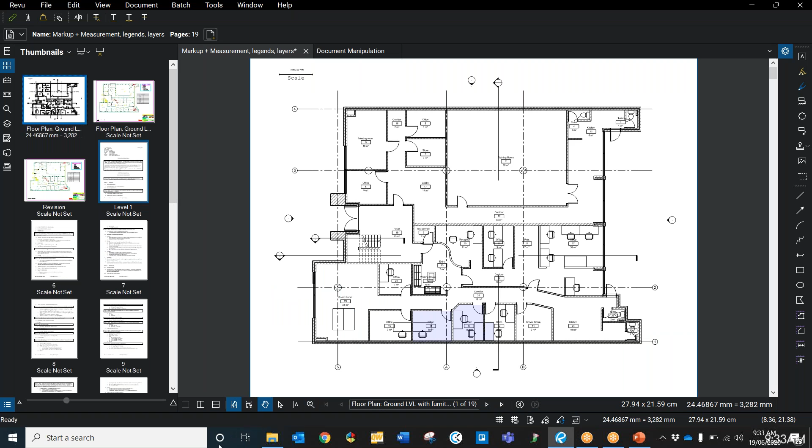All right, so I'll go into a couple of the ones that were sent in. The first one I had was to do with document comparison. I'm just going to close these that I opened and reopen some other ones. Someone asked me how they compare drawings. This is something I should have gone through during the sessions, but I forgot to, so we will go through it today. Let's just close these. Some different ones, sorry. Give me 2 seconds.

All right, so we've got 2 drawings here. One's a revision of the other. We've got an original drawing and then a revision that has a few different changes. There's 2 different ways we can compare drawings in here. Go to Document and then Compare Documents. The trick is to have whichever one is the original document as your active drawing, so that when you go into Document, Compare Documents, it picks up the active drawing as document A and the second drawing as document B.

In here you can manually align them, so you can select a window or you can pick points. Let's say you've got one drawing that's A1 and one that's A3. You can pick points on each one to align them so that they're the right size. Quite often you get drawings where the content's just moved up a centimetre on the page, or down or to the side a little bit. You'll find that if they're not aligned, it goes a bit crazy, so you can pick the points and align them if you need to.

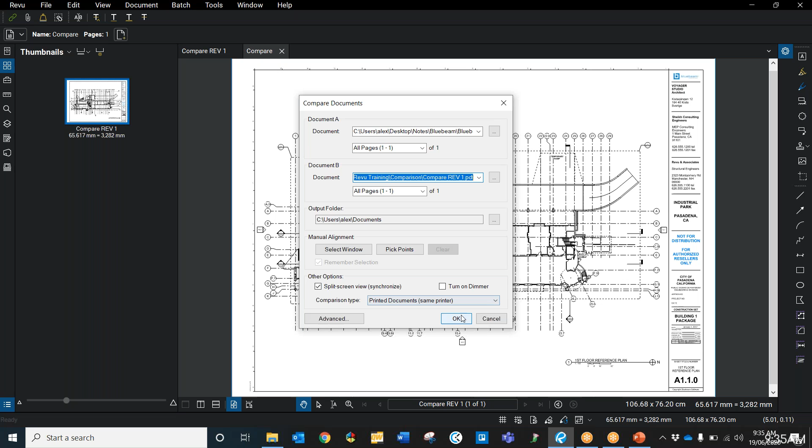And basically all it does is bring up the second one with all of the differences from the first one clouded. So anything that's been added is clouded in red. Anything that's been taken away is also clouded in red. So it's nice and easy. You can see quite easily what's changed. Once you zoom in, you can see that that wasn't there before.

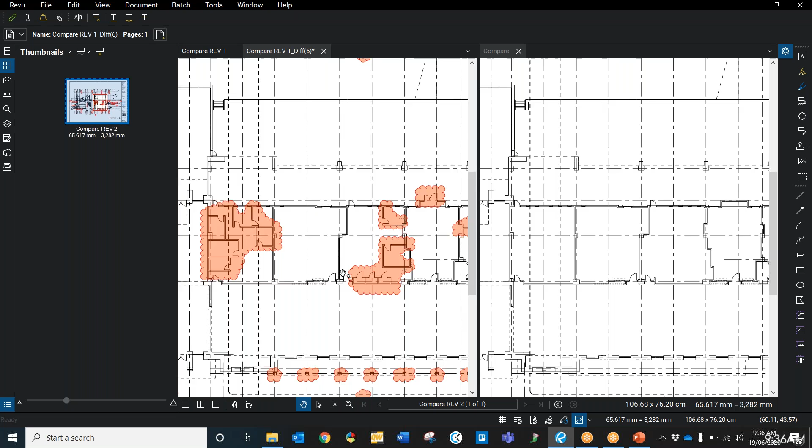We've got all these new rooms added, some doors added and stuff like that. And then we've also got these flags that have been taken out as well. The cool thing about this one as well is all of those clouds go into the markup list and their subject is Difference. So from here, you can generate a report of the markup summary. So go to PDF summary and then append and hyperlink to current PDF and hit OK.

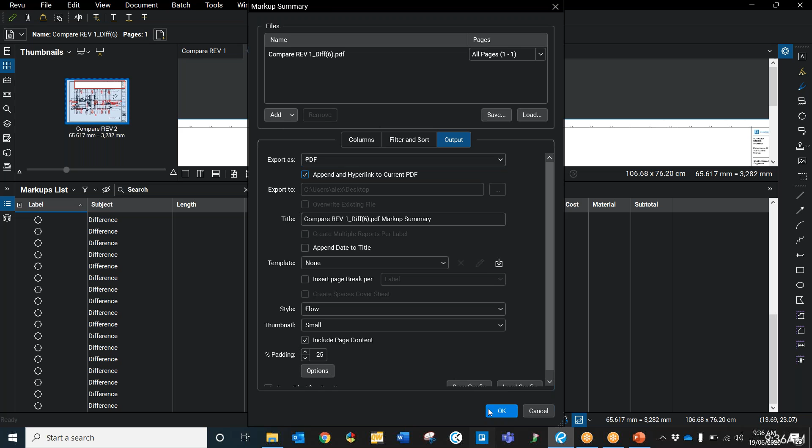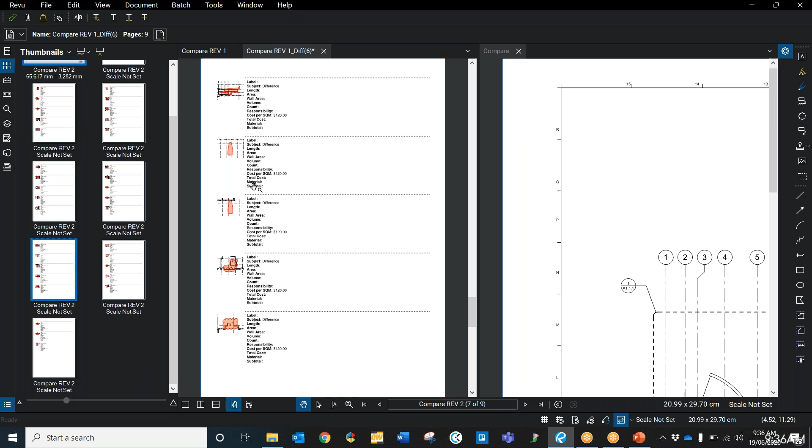Takes a couple of seconds to process. Cool, so then it comes up in here and we've got basically a report of all of the differences that we could send off to someone. Let's say the project manager wants a report of what's changed in the drawings, or just the boss wants to see what's happened. You can send a really simple report. If you click it, it hyperlinks to where it is in the drawing as well. So that's one way of comparing documents.

The next one is through the overlay function. So once we go back into here, the same thing, keep the active drawing as the first one. You go to document again, and this time overlay pages. This one, basically what it's going to do is put one drawing in one layer in red, one drawing in another layer in green, and then it will put them on top of each other, and you'll see what's not in the second drawing as red, what's in the second drawing that wasn't in the first as green, and then whatever's the same will go on top of each other as black.

You can change these colors, but I recommend to leave them as red and green by default, because it's much easier to see the differences. If you change, let's say, the green to blue, it's really difficult to see the difference between blue and purple once they go on top of each other. So unless you're colorblind and you can't see red and greens, then probably leave it as those. You can also add more drawings in here if you need to as well. So you can compare as many as you want with this function. But yeah, in this application, I'm just going to use these two.

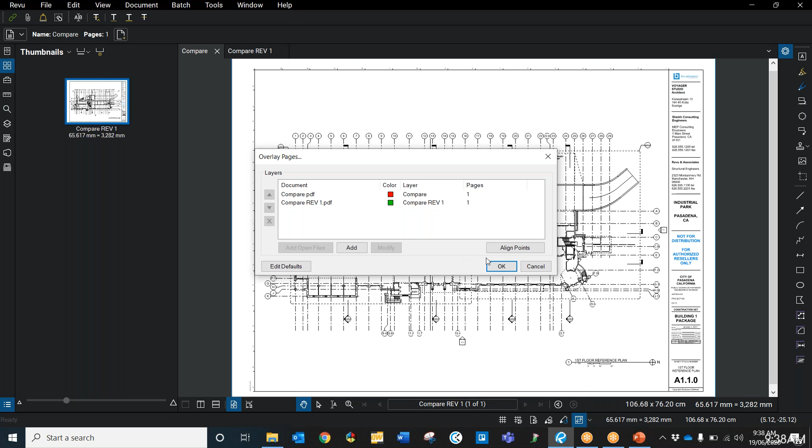Same thing, you can also align points through here. So you hit align points, and it'll ask you to pick 3 points, and it'll put the drawings on top of each other so that they match again. But hit OK, and you'll see whatever is in the second drawing that wasn't in the first is now green. Whatever's not in the second drawing that was in the first is red. And everything that's the same on top of each other is just black.

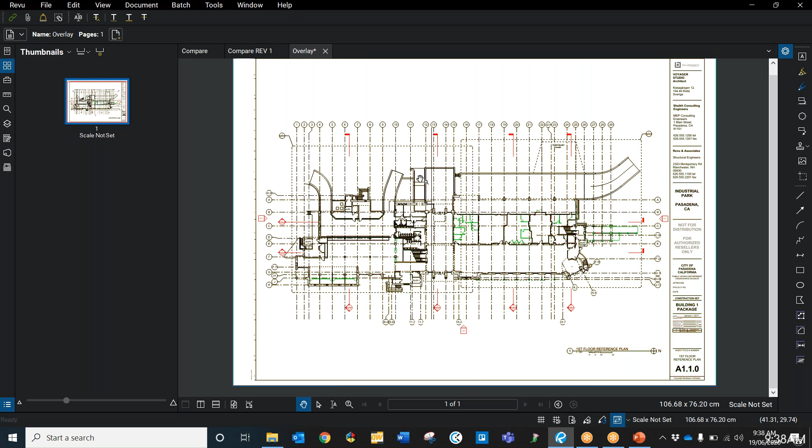One thing to note, this is quite a handy tool. If you do the first function, the compare documents, and you get clouds everywhere, it's impossible to see any differences. Quite often, sometimes the drawings are a little bit different quality. And if you go into overlay, you tend to see that the lines are just slightly not where they're supposed to be. So it's a good way of checking whether your drawings are matching up, and then you can use the pick points if they're not as well.

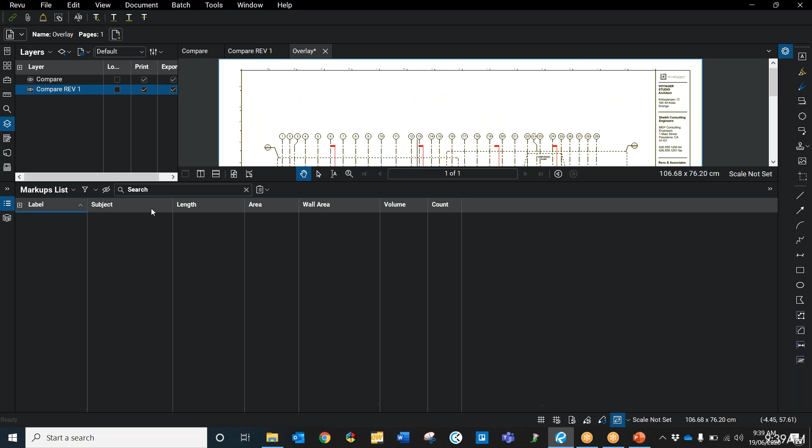But yeah, you can also go from here into the layers panel, and you can see they're in different layers. So I can turn off the first one, or I can turn off the second one as well. So I can just see each one. And then yeah, so that's one good way. The only thing with this is it doesn't give you a report of all of the differences. So you'd have to manually do that yourself if you wanted to. Or you could then use the compare documents function against the original again, and you get a cloud of all of those. So that's the two ways of comparing documents, guys.

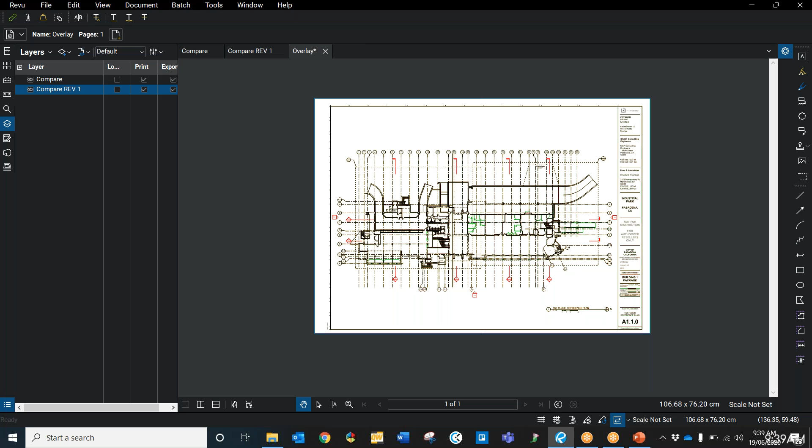So has anyone else got some more questions for me that we can answer? Or I go into some more that were sent in.

Hey, Alex, could you go through the reuse tools again? Yeah, sure. Just give me 1 sec. I'm just reopening Bluebeam. It went a little bit crazy for a second there.

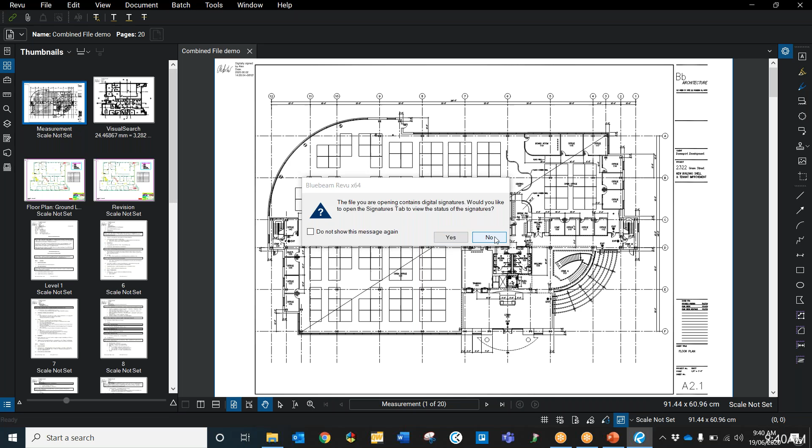All right, so yeah, Ty just asked about the reuse function. So as a sort of standard, when you open up Bluebeam, this doesn't come turned on. There's two different ways you can turn it on, but normally if I go to user tools, so let's just say I go to draw a cloud. When I click on the cloud, I can draw my cloud, but then as soon as I finish the cloud, the tool is no longer active, so I can't just keep drawing them.

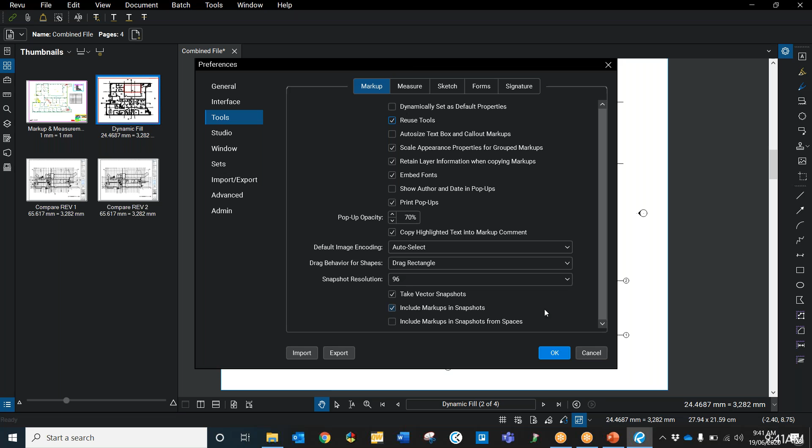So the reuse tools function, you go into Revu and then preferences, and then it's under tools and markup, and then you've got the reuse tools function here as well. So you turn that one on, and then we just hit OK. And now if I go to draw my cloud, I can just keep drawing them until I decide I don't want to anymore, and then just to get out of the tool, you just hit escape.

So the idea is if you're reusing particular tools quite regularly. Let's say you're dropping symbols onto a drawing. You obviously don't want to have to go back and click that symbol every single time you have to do it. You want to be able to just continue dropping them and putting them as you need to. So that reuse tools allows you to do that.

The other one that was really good to note in there as well, under Revu and preferences, is the auto size text box and callout markups. So if you turn that one on, what it will do, so let's say I draw a text box now and I draw it really, really big, for example, and then I just write my text goes here, and then hit escape. The text box auto sizes to the size of my text for me, so I don't have to go in and adjust it and that kind of stuff.

Just going back to the reuse tools as well, the other way you can turn it on and off is just through the status bar down the bottom here. If you don't have that turned on, it's just tools and then toolbars and status bar. It doesn't come turned on by default, but it's quite a helpful thing to have turned on. So this one here with the little kind of blue symbol on it is the reuse markup tools. So you can toggle that on and off through there as well, depending on what you're doing. So yeah, that's the reuse tools, guys.

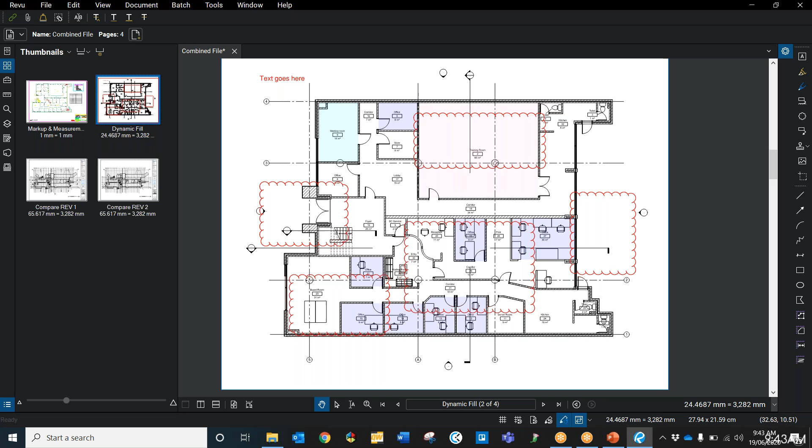Who's next with a question? Right, I've got a couple more that have been sent in that I can go through as well. Let me just see which one I should go through first. So, hi Alex, can you show how to calibrate again? Sorry, what was that, Lim? Can you show how to calibrate the drawing again? Yeah, not a problem. So that's quite an easy process.

I'm just going to go to this one. So obviously most drawings you get will have some sort of scale or a measurement on them. You hope so anyway, as long as they're drawn to scale. So with Revu 2019, it will auto prompt you to set a scale if there's no scale set on your drawings. But if you want to check it anyway, you just go to the measurements panel and then hit calibrate.

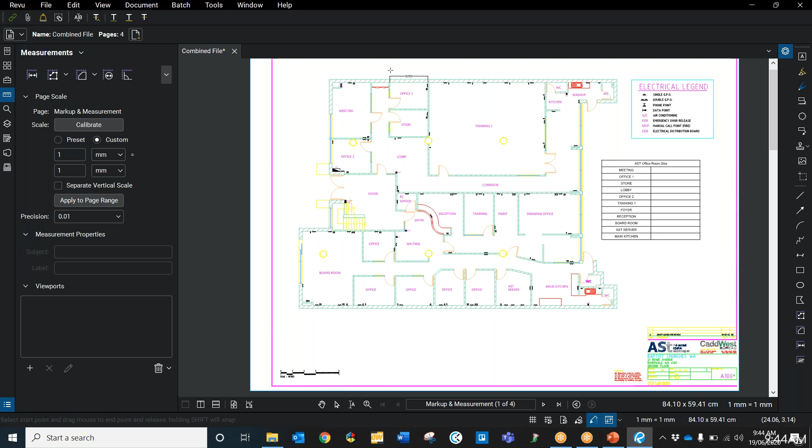Well, there's two options here. So you can actually just set a preset scale. So let's say you've got 1 to 100 or 1 to 50 or whatever it is, you can set it through there. Or you can do a custom scale and we go to hit calibrate and it'll ask us to select two points of a known dimension to calibrate measurement tools. So hit OK. I've got two options here. I can use my measurement up the top here. I can use my scale down the bottom here.

The trick with this is just to use something that's as long as possible. The longer it is, the more accurate your scale will be. So I can see that this is 5 meters. So I'm just going to go 5,000 millimeters. And then you can also set a precision in here. So you can set how many decimal places your measurements will go to. And then also a page range.

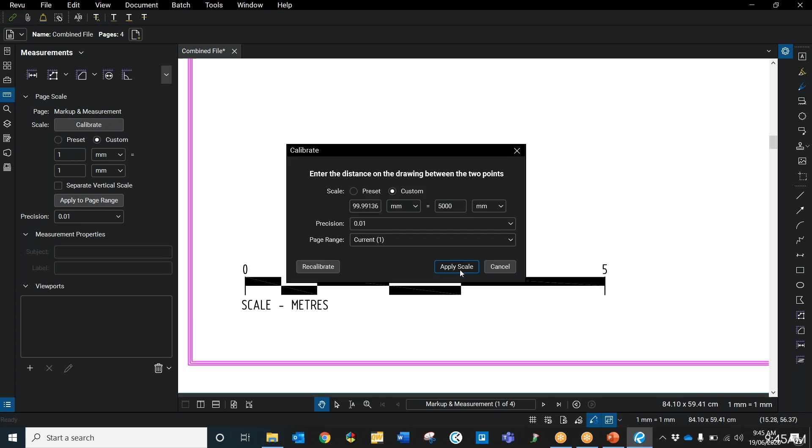So let's say you've got a 50-page document and you know the scale is the same on all of those pages. You can set it to all your pages, or you can just set it to your current page. But I'm just going to set it to the current page and hit apply scale. So now I know that that drawing is scaled. I can also just double check it. So I know that this measurement here is 3282. So I can just draw a line across here and double check that my scale is right.

So that's close. Apparently that scale down the bottom isn't quite accurate, but we've got 3281.13. So if you want to get it even closer, we can try using this measurement. It's probably going to be a little bit more accurate than that scale down the bottom. So we go 3282, that scale.

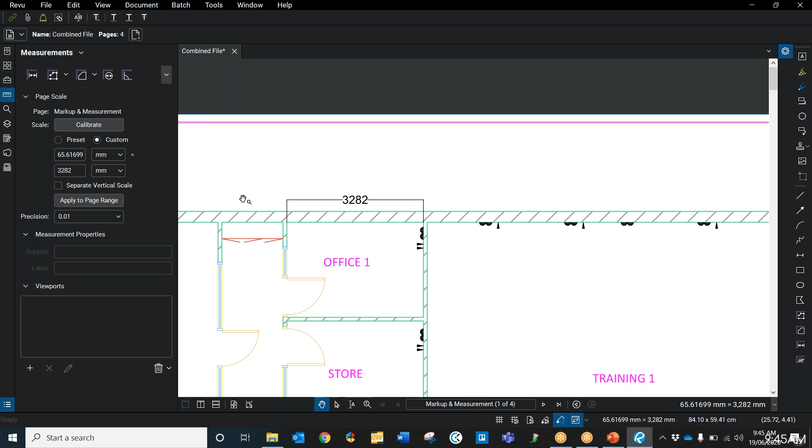One thing to note, if you set your scale and then you realize that it's incorrect, so let's say we set it and we go back and realize, oh, the measurement was actually different to what I input in there. You can just hit calibrate again. Even if you've done heaps of measurements, you can just hit calibrate again, recalibrate, and it will automatically recalculate all of those measurements for you.

So now that I've done it off here, we should see that this is correct now. So yeah, 3282. And there we go. That's calibrating for measurements, guys. Anyone else have any questions?

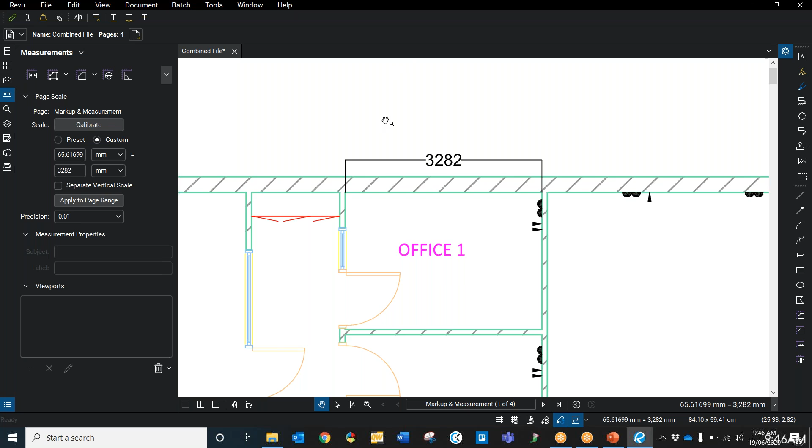So one question we did have was just to do with counting and using the visual search again. So I think we went through this in one of them, but I'll just go through it quickly again. So let me just open up something. Not this side. Cool. So basically, there's a couple of different ways that you can count things. So it really depends on the quality of your drawing of which one you use as well.

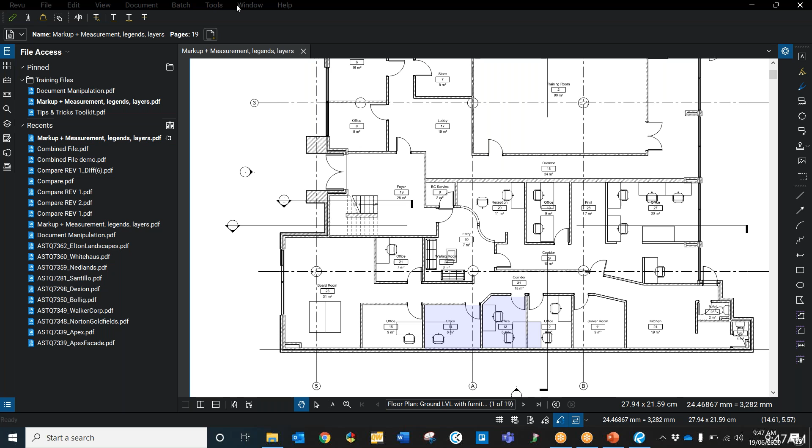Oh, sorry, just saw a question in the chat box from Constantina. So what if the horizontal scale is different than vertical scale? Good question. So in this measurements panel, there's a button just underneath where the scale is set there, which has separate vertical scale. So in here, you now have an option to set an X scale and a Y scale. So your horizontal would be your X scale and your vertical would be your Y scale. So yeah, you just hit that separate vertical scale button and then you can set different scales in there. Cool, but for now I'm just going to unselect that.

All right, so going back to that searching. So yeah, for this it really depends on quality of your drawing, how it sort of appears, and how good quality the symbols are and how they're drawn as well. So under the measurements panel there is a counting tool. So it's just this one here, it looks like a tally. You hit that and you just click over whatever you're trying to count. So let's say we're counting these chairs, and you just click them all until you get it.

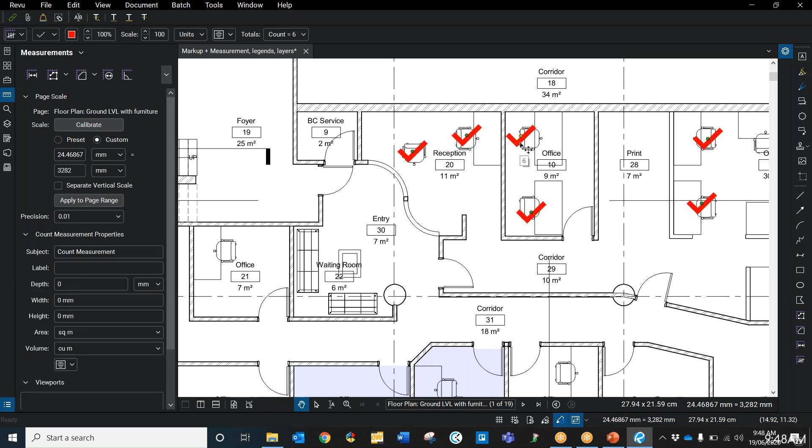Obviously it's quite a manual process, it can take some time. You have to visually find them all as well. It's probably not completely accurate. I know my eyes are pretty bad, so most people tend to have that same sort of issue. So what we have is the visual search function. So under search, you hit visual here, and you go to get rectangle.

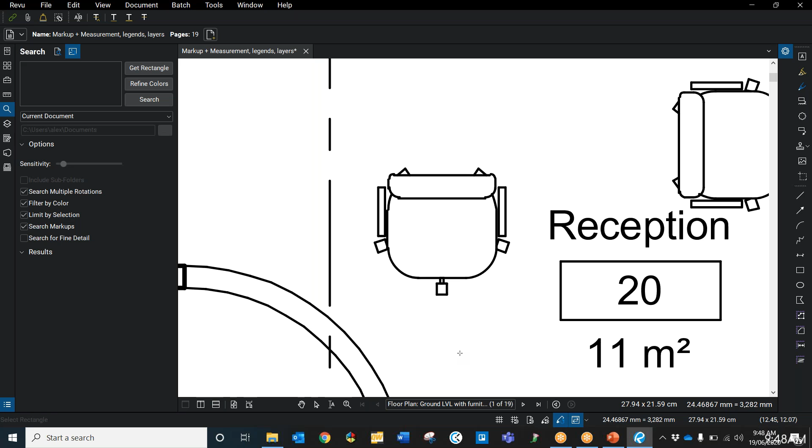The trick with doing this is to find one that has no interference with it. So we've got this chair that's just in open space here, and then you just draw a box around it as close as you can to it. Again, the closer it is, the more results you will pick up. There's a few different settings, so you can toggle how you want to search. So you can either search the current document, the current page. So I'm just going to search the current page today.

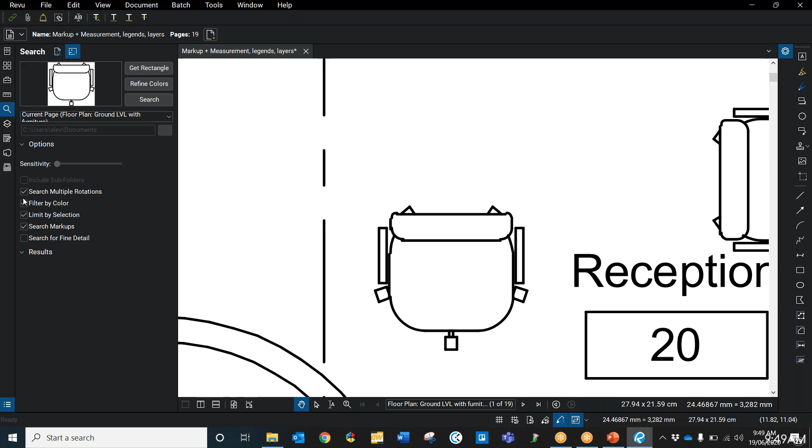You can also search all open documents, or you can search through a whole folder, or just through your recents if you want to. Let's say we've got a whole folder of documents that we need to search for a particular item in. You can do that without having them open as well. Just go through and find them through the file path. And then you can also adjust the sensitivity. So the lower the sensitivity is, the more results you pick up. You can search for multiple rotations. So obviously we've got different rotations of these chairs.

We want to leave that on. You can filter by color. So let's say we snapshotted some, changed the color of it so we can see what we've added. You can filter by color and just pick up the ones that you've added. You also have to have search markups on for that. And you can search for fine detail. So if you wanted to pick up ones that have a particular line across them, then you could do that. But in general, you pick up more results if you have that turned off.

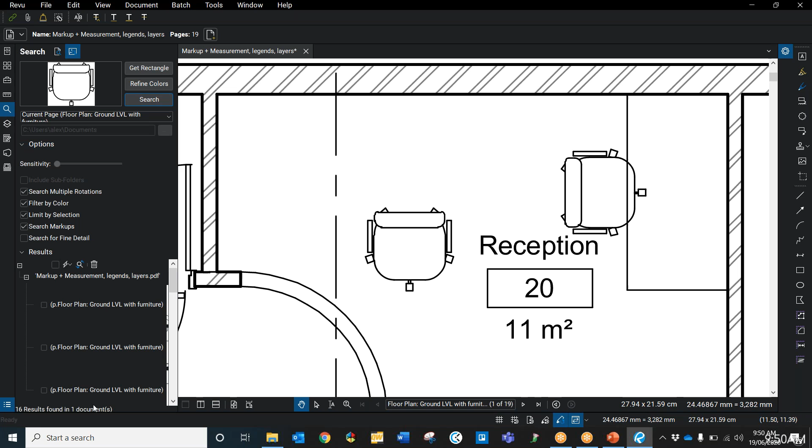So you just hit search up the top here, and it goes through, searches through the drawing and tries to find as many as it can. And you'll see down the bottom, it's telling me it's picked up 16 results. And I can select them all through here and just hit this little lightning bolt option here, which is the check options. And there's a few different things you can do. You can highlight them, underline them, all that kind of stuff.

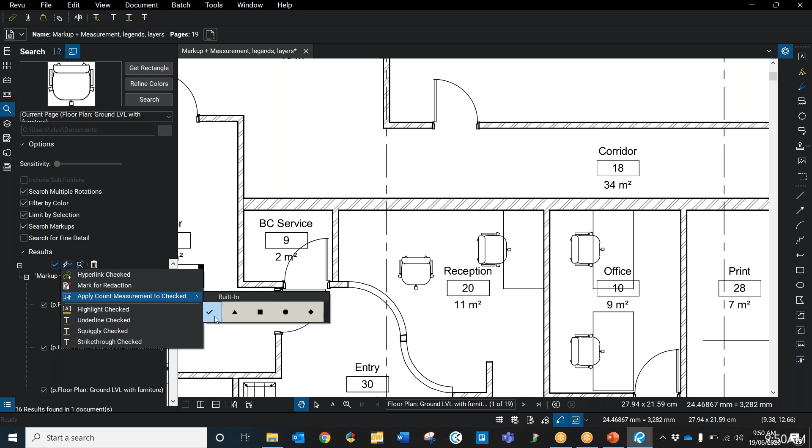Usually if you're using text, that's probably what you would do. Or you can apply a count measurement to checked. So that's what I'm going to do today. I'm just going to hit tick there. And you'll see it's gone through and ticked all of the chairs for me. I know, because I've done this quite a few times, that there are 16 chairs in this drawing. Sometimes it only picks up 15, so it's really good to have a quick look through and just see whether there's any more.

If it picks up something that you didn't want in there, you just right click over the tick and you can split the count, and it splits this one off. So now it's just got this one selected, so I can delete this one off. And then the rest of my count is still normal.

If you find it hasn't picked up all of the results and there's still a couple remaining that you can see in the drawing, you just right click and go to resume count and add it in there, and it will then become a part of the group again. So yeah, that's visual searching to count, guys.

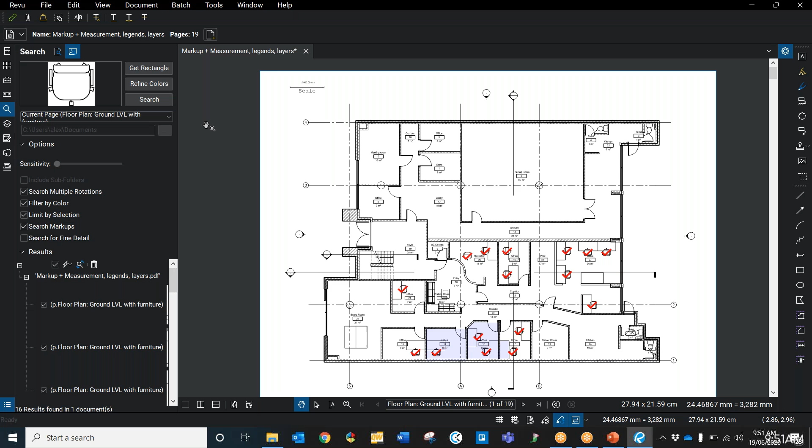Quite a useful tool. It isn't perfect, like I say. You've kind of got to play around with it, and it really depends on the quality of your drawing, quality of your symbols. It depends on how much interference there is with the symbols as well. So.

Anyone else got any questions?

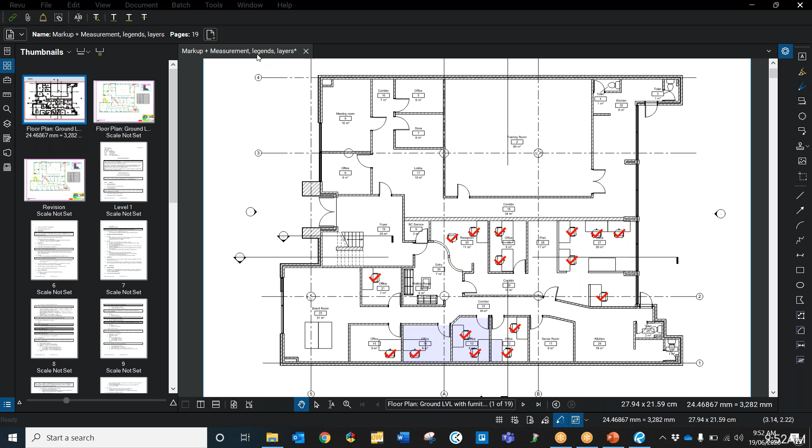So I've got one more that got sent in in regards to 3D PDFs. So someone asked what you can do with 3D PDFs in Bluebeam, what its functionality is. So let me just open one up. This is the last one I got sent in. So if anyone else has any to ask after this, feel free, that'd be great. So it just takes a couple of seconds to load because it's a 3D model. It's a little bit of a bigger file. Just give it a couple of seconds.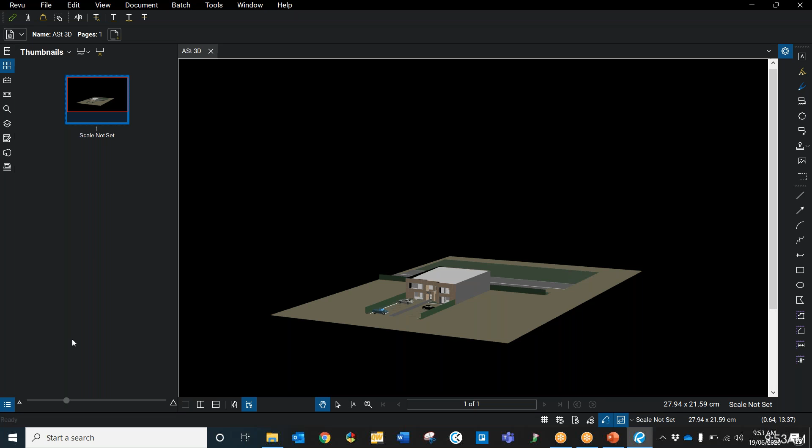So with 3D PDFs, it's quite a basic kind of functionality, but there's some cool markup kind of stuff that you can do. So this here is just a basic drawing of our office here in Perth. So you can click and drag it around. You can sort of navigate around it. You see the back side. Through here, we've got some windows on this side, so you can actually scroll in. You can see in through the windows there.

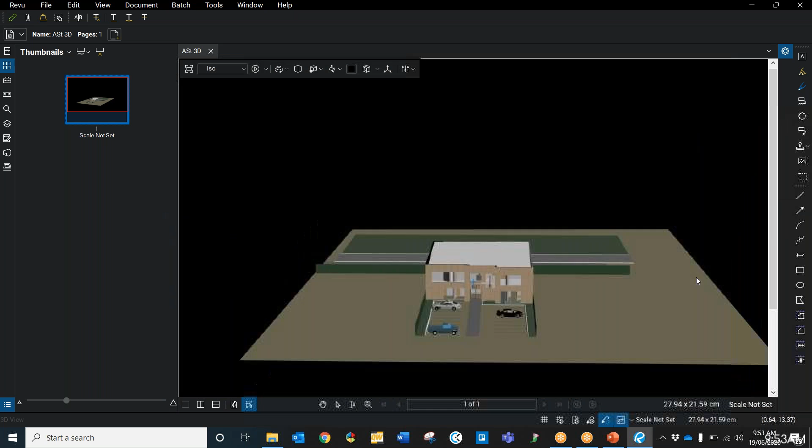I can turn this around and just navigate around it. You can also transform this. So if you hit the transform button here, and then select an element, which is the roof here, you can hit this arrow and pull it up. And you can then do it with the inner roof as well. So now I can actually see inside. I could do that a bit higher if I wanted to.

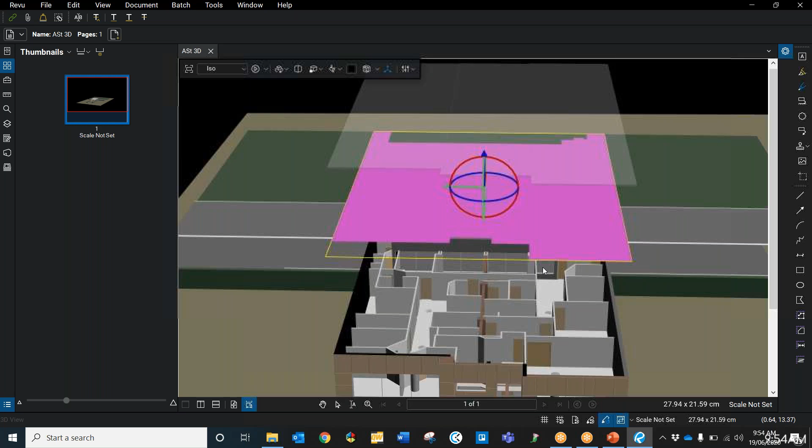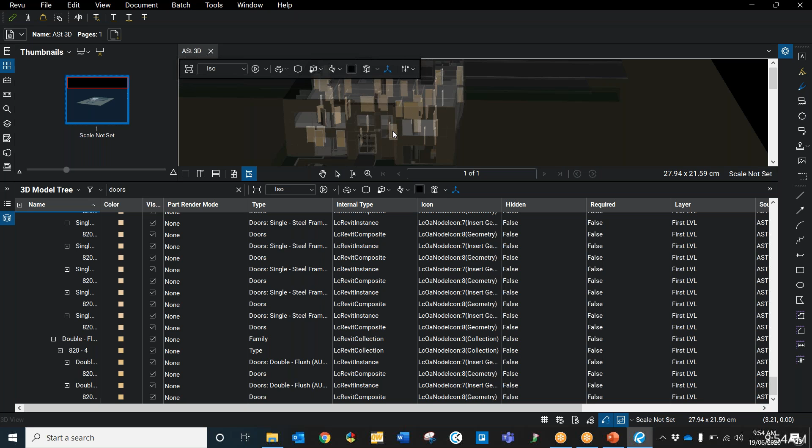Down the bottom here as well, where the markups list is, there's also an option for a 3D model tree, and you can search through it here. So search, say, doors, for example, and it highlights all of the doors for me. And you could select a particular one. You could copy that, and then open a new PDF. If you just want a drawing of a particular element, you can paste that into here.

That didn't work, hang on. Where are we? It's going a bit crazy on me at the moment. Let's try that again. Just let it reload again. 2 seconds.

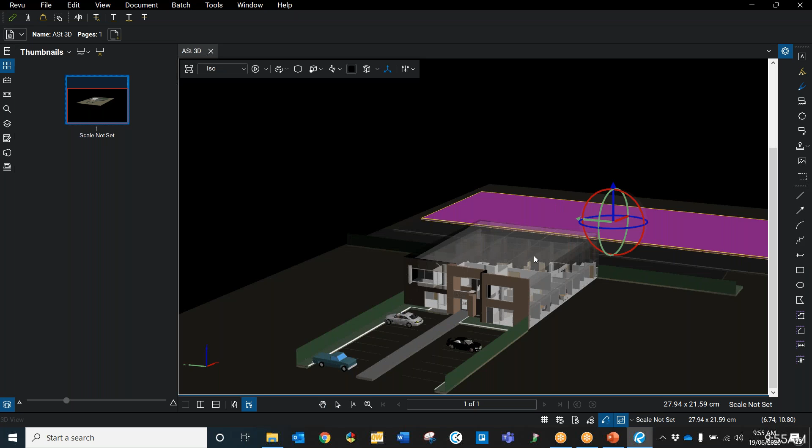All right, cool. So let's just transform it again. Pull those roofs up. Let's just search for the doors.

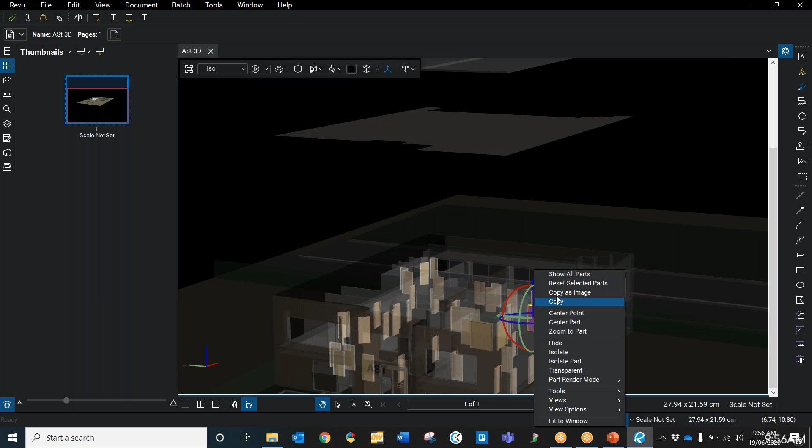So let's say we want to copy this one here. Right click, and we're just going to copy. Open a new PDF.

And paste. It just asks us to draw the 3D window, so we draw it and hit OK. Give it a couple of seconds.

It's not playing ball today, it should copy that across anyway. It's not really liking my 3D PDFs today. Let's just reopen. I'll show you what else you can do with it other than that anyway. But when I do that, it should copy that door across. You could then send that as the particular item to someone, put markups on it, whatever you need to do.

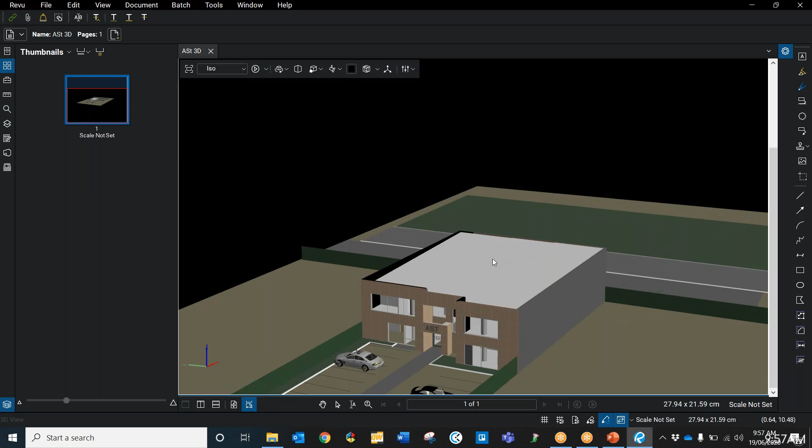From here as well, so we can transform this again. You can also do markups. So let's say we zoom into a particular spot in here, let's go into this office here. We can draw in here, we can do a cloud and say review defects in this office, for example.

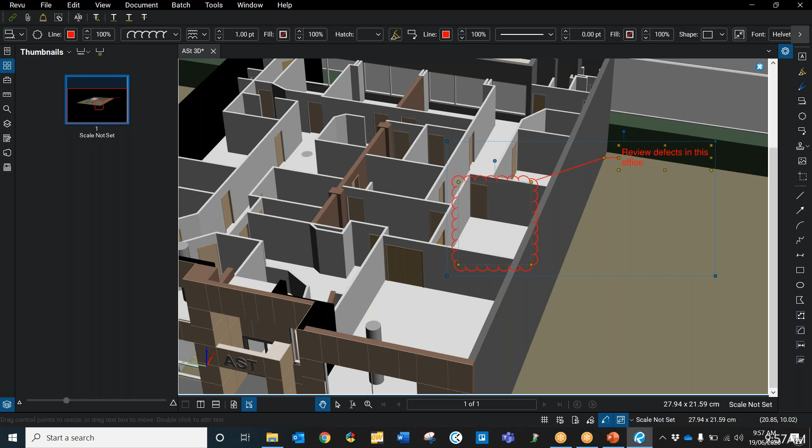And then I hit escape out of here. It goes out of my markup view and this little blue dot appears. So if I play around with it, then if I hit this blue dot, it brings me back to that view that I was in when I put that markup on, so it doesn't sort of lose its positioning as well. You just hit escape again.

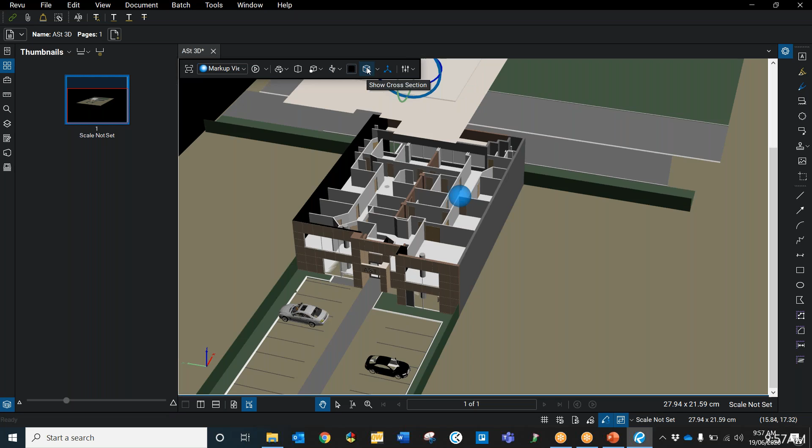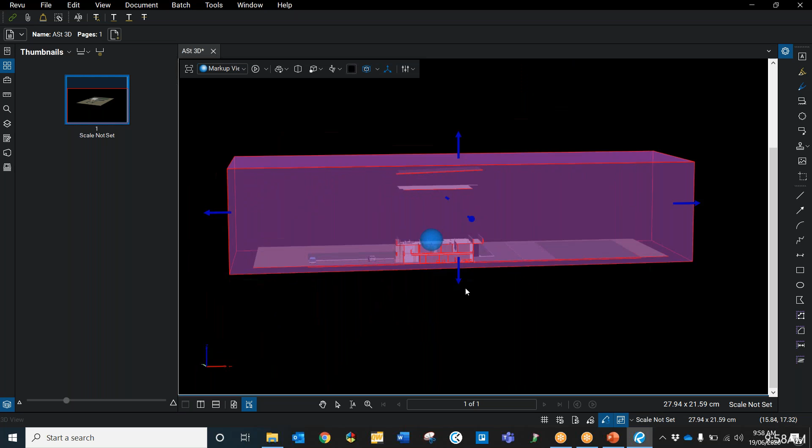But yeah, that's pretty much the limitation of it. You can also show a cross-section box, so you can move in here, show section box. You should be able to move this from here. There we go. So you can sort of section it, look around, see what's inside from that section. So yeah, there's quite a range of things you can do in there.

But you can't do measurements or anything like that. It'll only let you do basic sort of markups. It's hard to measure off a 3D PDF. You can also change how it appears in its view, whether it's a wireframe or whatever you want to do. So yeah, that's 3D PDFs, guys.